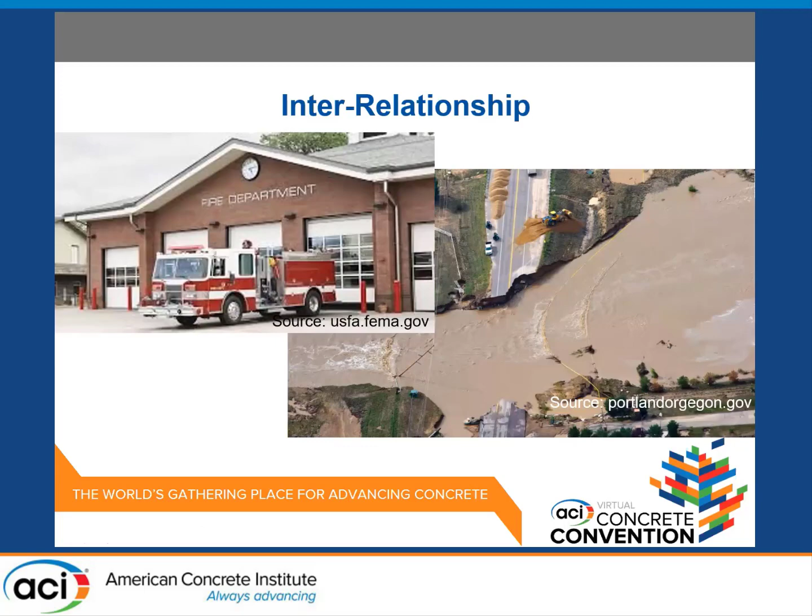One of the very first groups to ever try to address resiliency, and really has established many benchmarks for the models that are out there today, is the San Francisco Planning and Urban Research Organization. This probably goes back to the 1990s. They started with recognizing that many of their hospitals were very old and not built to the current seismic resistance levels necessary for what we learned we could expect in the San Francisco Bay Area.

So they started a program to upgrade hospitals. And as they were doing this, they said, well, wait a minute, what about everything else? So they actually went and inventoried not just hospitals, but sampled some of the construction that was out there to determine how long it would take for those structures to become functional again. And this was a great first attempt. I don't think anybody preceded them in trying to come up with a baseline.

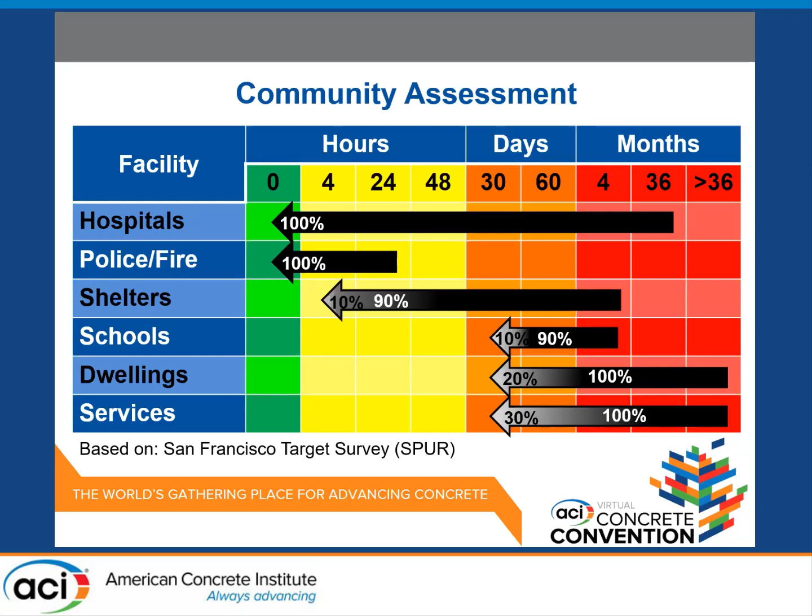You don't need all the residences to be occupied within 30 days. Maybe it's only 20% within 30 days, and maybe 50 more percent in 60 days, and you get to 100% in 4 months. So all of this stuff needs to be integrated into some sort of community plan. And I mentioned that it doesn't just stop at the community. These resiliency factors become far reaching.

A good example of a national impact is Hurricane Katrina. We lost chemical plants and refineries, they were shut down, and that raised gasoline prices and even limited availability because of chemicals that were no longer available. It even restricted the amount of unleaded fuel that could be produced elsewhere by other refineries. So it clearly had a national impact. We all saw the gasoline prices go up.

Another one had an even more global impact, the tsunami in Japan. What happened there is the only manufacturing facility that produced a key element for automobiles was taken out, and it stopped production of automobiles throughout the entire planet, all because of one disaster in one area.

So this stuff is extremely important, and it requires paying a lot of attention to many implications.

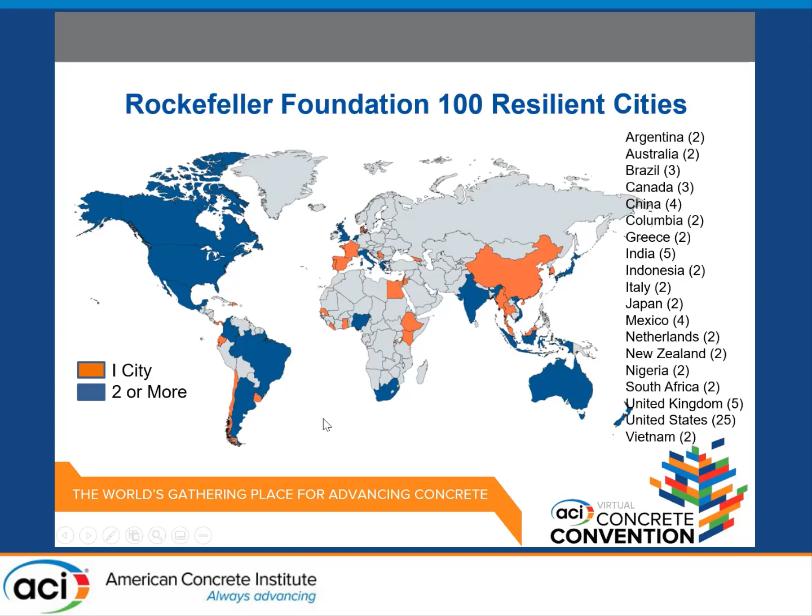One of the earlier programs that tried to address resiliency was the Rockefeller Foundation 100 Cities. This program doesn't exist anymore, it's no longer funded by the Rockefeller Foundation, but I included it here because it started looking at how to determine what resiliency is and what it means for communities.

I picked San Francisco and San Diego because globally they're relatively close to one another. But when we looked at what San Francisco thought was important, it differed from what San Diego thought was important for becoming more resilient. San Diego doesn't have earthquake faults running right through it, so their emphasis on seismic wasn't nearly as great as San Francisco. So it clearly means different things to different groups. Their stressors are completely different.

Let me back up one point. This Resilient Cities program is actually gradually morphing into Resilient Cities Catalyst. The resiliency cities program mostly helped communities and cities identify what their stressors are and who the right people are to bring together in collaboration to develop resiliency plans. Resilient City Catalyst started in February of this year to try to bring the cities that were participating in the Rockefeller 100 Resilient Cities program to move forward.

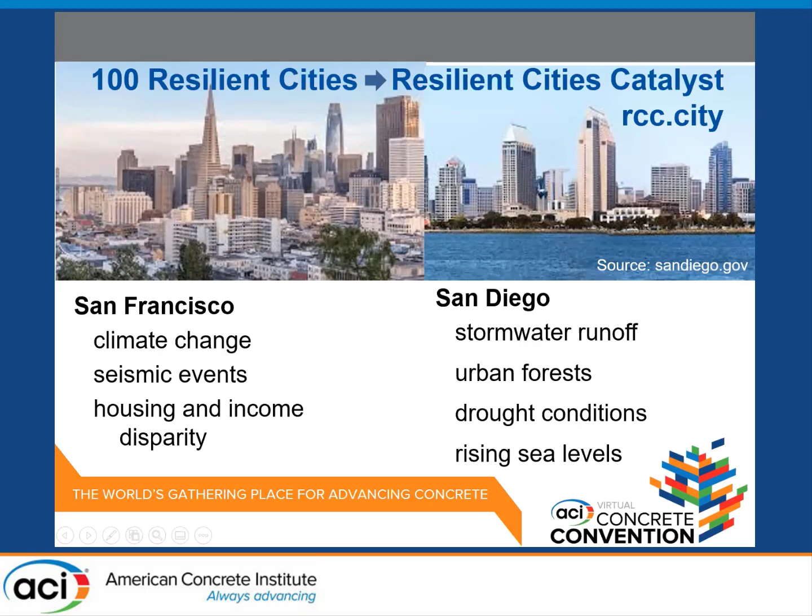Also on a more global scale, there's the Sendai framework that Julie also mentioned. It's looking at disasters slightly differently than most engineers will, because it's looking not just at the physical structures and their capabilities, but at livelihoods, health, social, cultural, and environmental assets across the board. And it expands the scope not just to individuals and businesses and communities, but also to countries and global impact.

But their targets tend to be a little bit different at that level than the targets you would have for an individual project. They're clearly looking at the mortality of the disasters, which can be extremely huge when it's an island nation in particular, and at reducing the number of affected people, which could be global impacts as well as local impacts. As for the economic losses, what the engineering and construction community can influence the most is helping provide infrastructure that will resist damage and disruption.

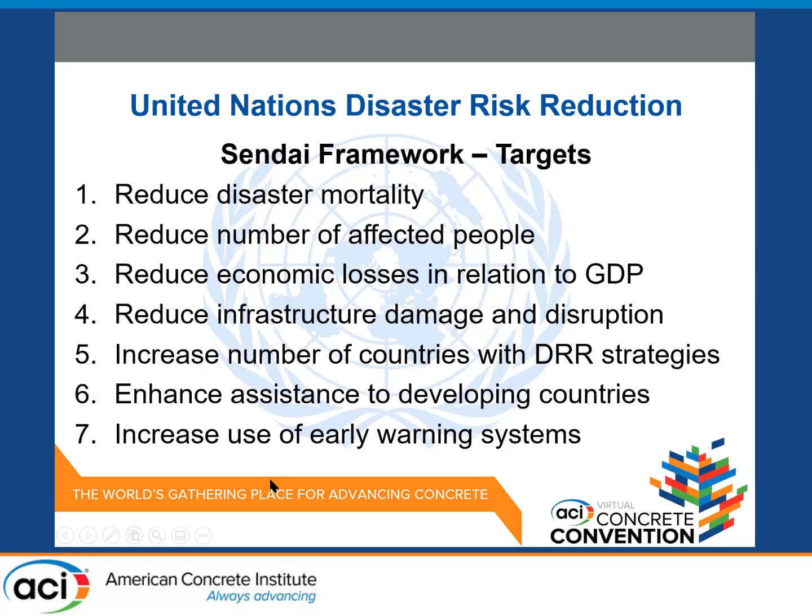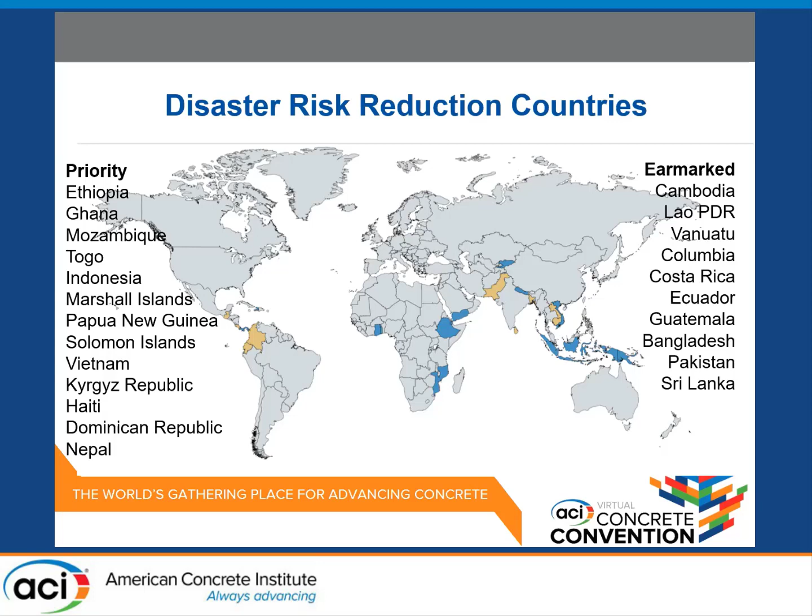So the Sendai framework is trying to increase the number of countries in their disaster risk reduction program, and trying to foster support and get organizations to participate in programs in those target countries, with the addition of early warning systems, which tends to be outside of the design and construction community. The countries currently identified as priority are shown here in blue, and some earmarked for the Sendai Framework and the DRR program of the United Nations are shown in yellow. It's an attempt to try to get especially developing nations more engaged and more resistant.

Then we start driving things down to more of a national level and national programs. I'm in the US, so I'm most familiar with the programs here in the United States. The National Institute of Standards and Technology has 5 components to their resiliency program. It starts with guides and analysis tools.

Their guides include a planning guide for communities, volumes 1 and 2, that help communities identify what their stressors are, how they can take approaches, and what approaches might be available to them to develop good resilience planning. This includes emergency response and recovery, it's more than just the design and construction.

They have a good modeling program, INCORE, or they're working in cooperation with this modeling program, INCORE, which helps them model the types of disasters and events that can occur.

One of the biggest issues out there for communities or anybody trying to deal with disasters and potential disasters, as Julie, Scott, and Jeremy alluded to, is that everything we do to date is based on historical records of disasters, but we know there's sea level rise. We don't have sufficient credible programs accepted to allow communities to make judgment calls about what they need to do and where to put their financial investments, and where to restrict construction or require different construction in order to resist storm surge, additional flooding, and other things related to sea level rise.

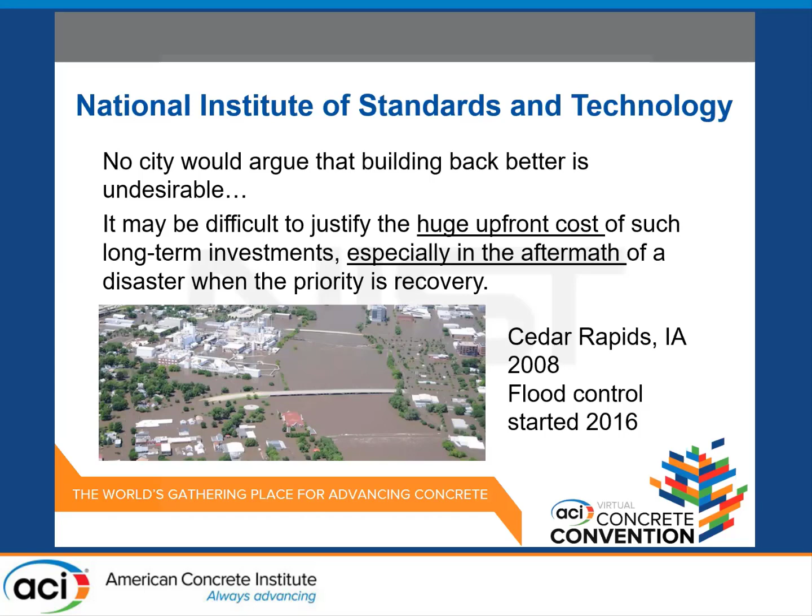There's also earthquake risk reduction as part of their programs on resiliency. The collapse assessment and performance-based engineering, earthquake engineering, are two things they work very closely with the National Earthquake Hazard Reduction Program, NEHRP. And you heard, I believe, Scott talk a little bit about, and Julie talk about the Building Seismic Safety Council and performance-based design. So that's helping us to even improve more so what happens with earthquakes.

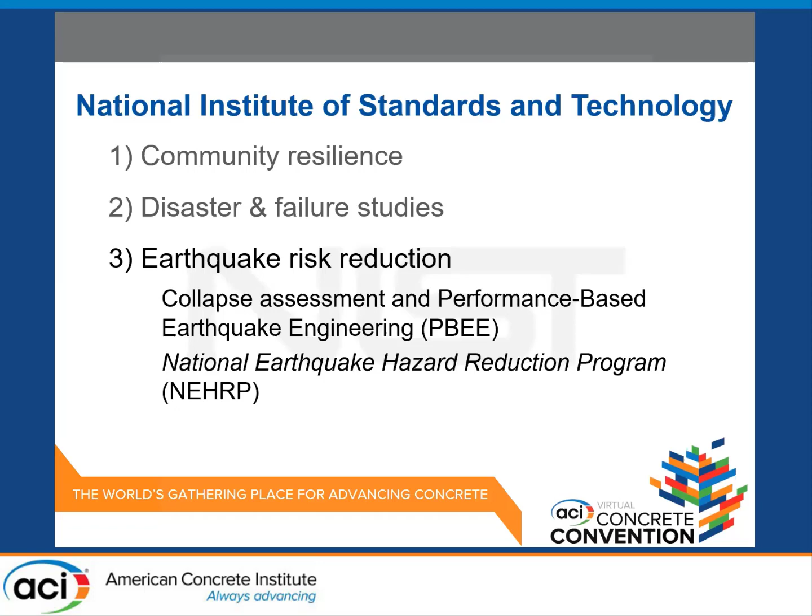Going to digress here a little bit to say that in the United States, at least, and I think it's global, we do a pretty good job of dealing with earthquakes because there's no warning system for earthquakes. So the way we address disasters related to earthquakes is we do collapse avoidance, and that saves lives. For almost every other disaster that happens — hurricane, wildland fire, tornado, other wind events, floods — what do we tell people to do? We tell them to leave. That's our life safety; we evacuate. They may go back to scoured slabs, they may go back to burnt out structures, but we didn't lose any lives. So the intent of the building code is satisfied by having this evacuation. It's not sustainable and it's not resilient, but that is what is currently accepted in our society.

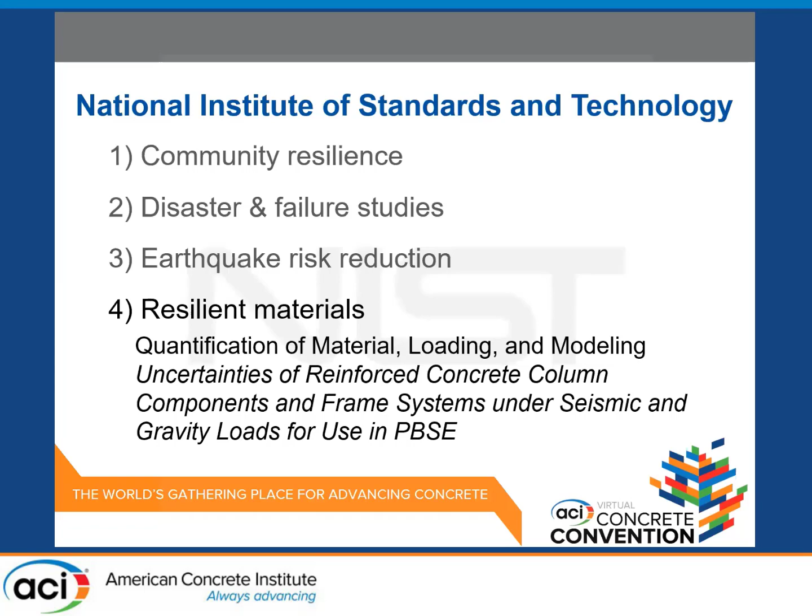They also have a program on resilient materials, and this is about quantifying how materials will perform. It's getting into fairly detailed and complex analyses and evaluation procedures, but they do have some programs related to reinforced concrete columns and components in reinforced concrete frame systems. They're trying to get a better handle on determining the uncertainty at the component level and the impacts of loadings on these structures as they get to extreme loading conditions.

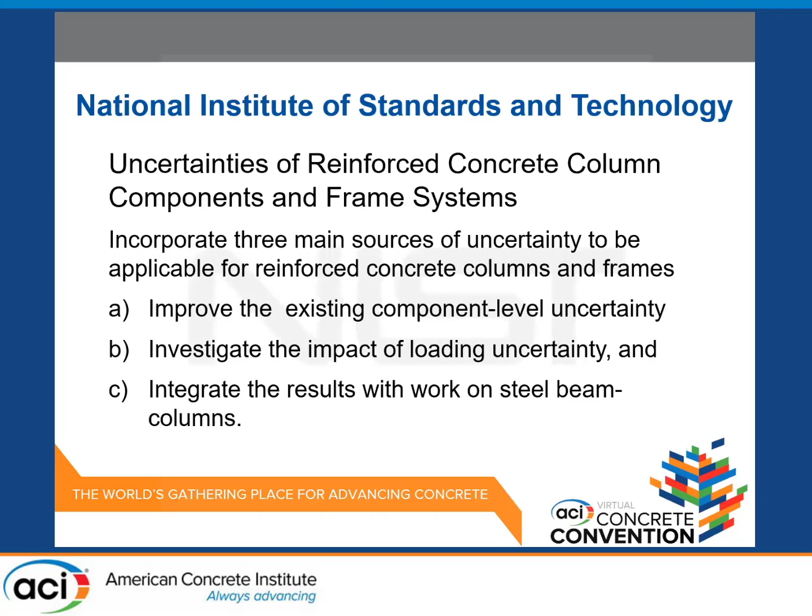They have already completed a project on steel beams. This project is still underway, and then they're hoping to integrate these results with some of the information they have on steel beam column connections.

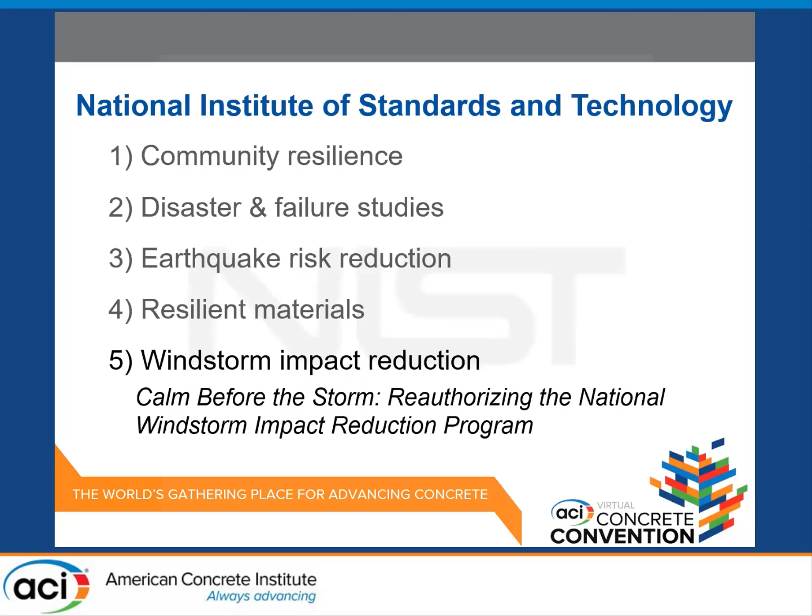Then finally, the fifth component is the windstorm impact reduction, the calm before the storm. Again, they're working with other agencies. They are supporting the reauthorization of the National Windstorm Impact Reduction Program and providing input to our load standards. So with the windstorm reduction impacts, structural performance for multi-hazards — what happens when you have a fire after a windstorm? What happens when there's flooding combined with a windstorm such as a hurricane? These are all interrelated and things that need to be considered and addressed.

We lost a lot of facilities after Hurricane Katrina to fires after the disaster. Most of the damage, even back into the 1906 San Francisco earthquake, was fires after the earthquake. It wasn't the earthquake itself that destroyed the city — it was a combination of the earthquake with more damage actually happening from the fire and gas explosions that occurred subsequently to the earthquake.

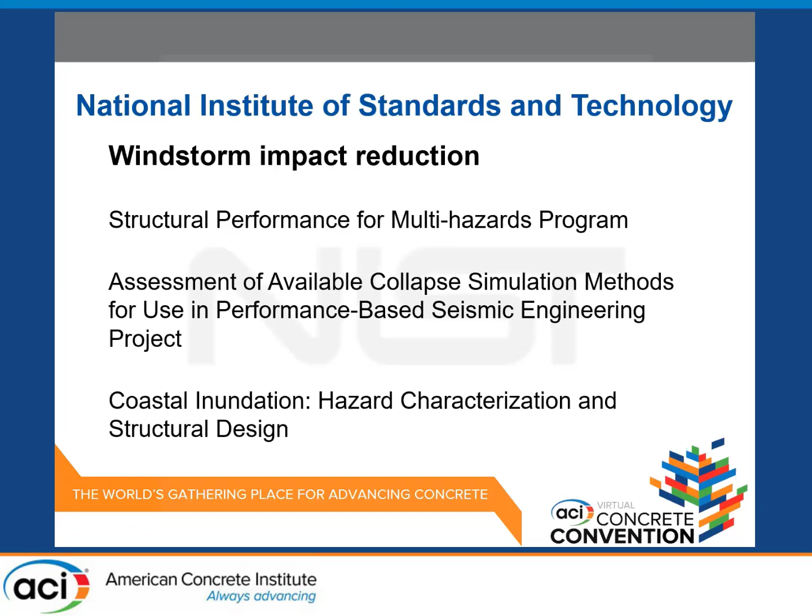They're also looking at performance-based seismic engineering projects and trying to categorize coastal inundation and structural design to resist those effects. One outcome is information from this cooperative effort with multiple agencies through NIST, working with ASCE 7.

There will be new tornado load provisions in the next edition of ASCE 7-22. We've handled tornadoes for decades, but in a strange way, because we evaluated them on the Enhanced Fujita scale, determined by the amount of damage.

These are both F4 tornadoes. One went through a town, and you can see what kind of damage it did, so you knew that was clearly an F4 tornado. The other tornado went through a farmer's field—there's no way of telling. So we don't have good records on where the intense tornadoes actually occurred, because we have no physical records of the damage that would have happened if they'd hit structures.

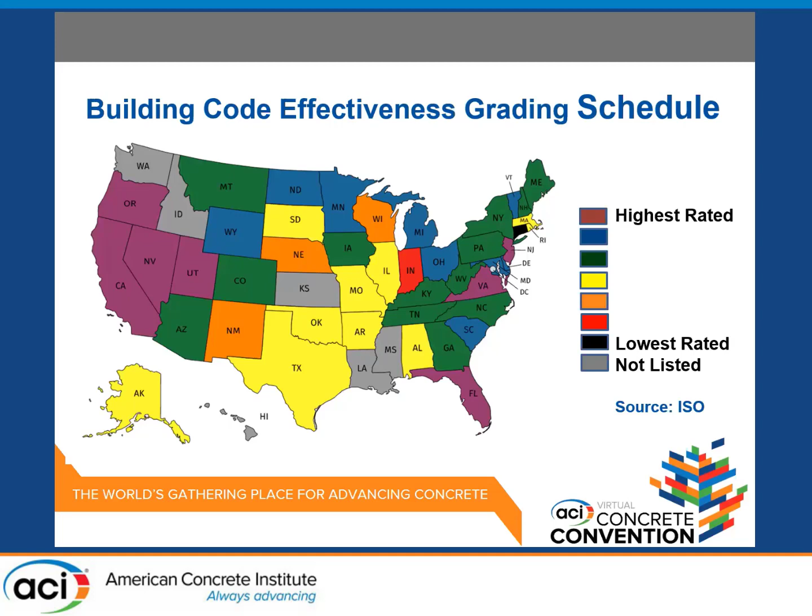One place where FEMA has helped a community a lot, and the community was fairly innovative in addressing flooding issues, is they assisted through grants for the community to buy out residents and businesses located in the floodplain. We have a lot of structures, especially in older cities, that are immediately in the floodplain.

The reason they were in the floodplain is that when they were first built, commerce and everything was dependent on those waterways. That's how they got located there, and for the benefit of conducting business and having access to those waterways, it was worth the risk of having structures there.

Well, those waterways are no longer, in many jurisdictions, the primary source of transportation or moving goods, so they don't need to be there anymore.

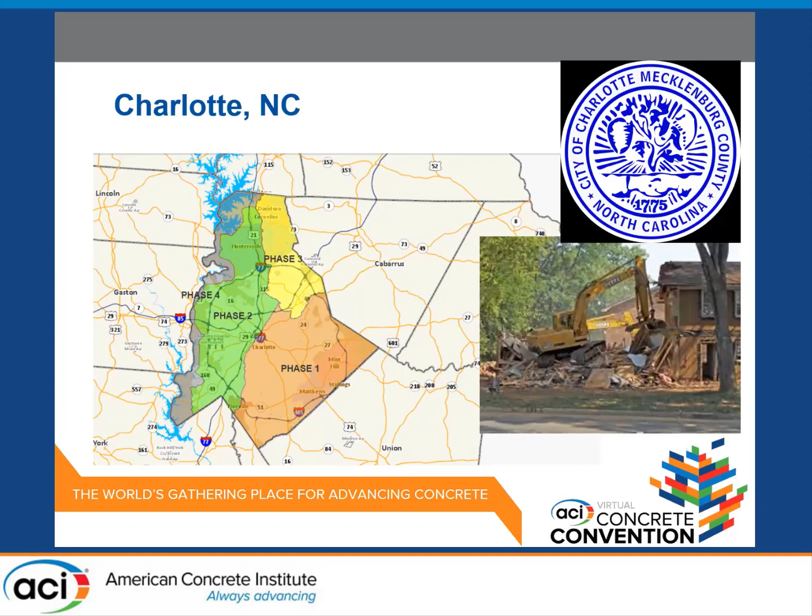In combination with the grant, Mecklenburg County, Charlotte, North Carolina, also incentivized developers by relaxing density requirements, allowing denser development in certain areas where they wanted people to move when they were buying out and demolishing their homes and turning the wetlands into parkland. It turned out to be a really good model for incentivizing developers and providing affordable housing while buying out houses and businesses in the floodplain.

The National Institute of Building Sciences has multiple programs related to resiliency, or with resiliency components in their councils and projects. The four that come to the top: number one, the Building Seismic Safety Council. They develop, through NEHRP, research on earthquake engineering.

The Building Seismic Safety Council has a group called the Provisions Update Committee, and they take that research information and figure out what's worthwhile to put into the code. Once it goes through that process, those recommendations get fed into a consensus standards development process through the American Society of Civil Engineers Structural Engineering Institute.

They also have the Multi-Hazard Mitigation Council. This has been very active in figuring out what the disasters are, what happens when you have multiple hazards, and also trying to come up with ways to invest and fund mitigation techniques.

From that council, there was an offshoot which became the Council on Finance, Insurance, and Real Estate, because those are the people who are ultimately going to determine the investment levels. And it gets really complicated when you talk about it.

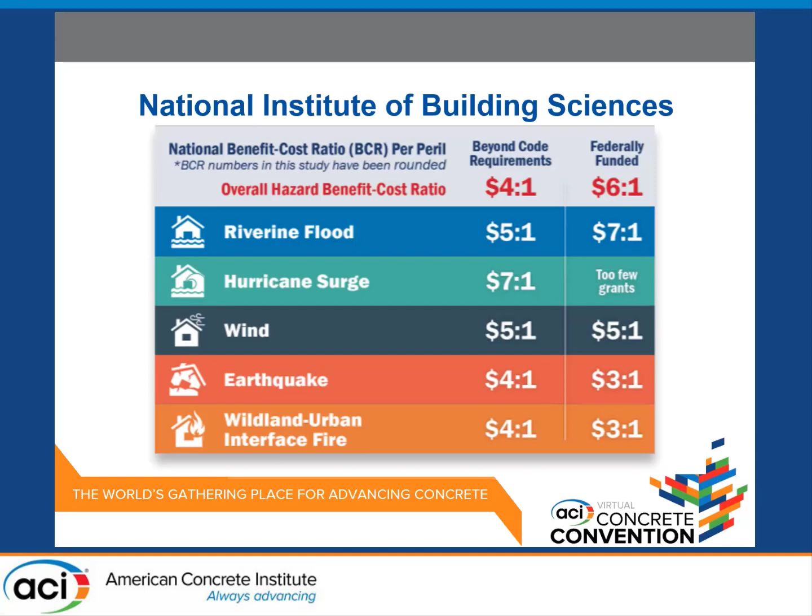So there's a lot of good resources here, a lot of great programs. Resiliency and enhanced resiliency is not new. Every structure has some degree of resilience to it. Will it withstand a disaster? We have no way of knowing.

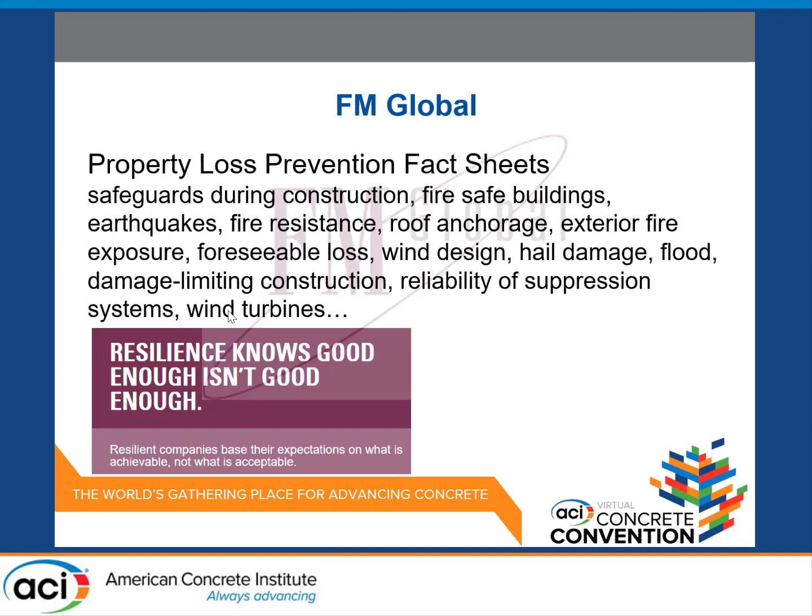But FM Global is a good example of one insurance company that works with owners to enhance the resiliency of structures. They work with them about foreseeable loss. They have great resources. Back in 1994, or prior to 1994, Anheuser-Busch in California invested $1.2 million in seismic retrofits. Northridge earthquake occurred. Anheuser-Busch considers that they probably saved $1.1 billion in combined property and business losses because they were able to stay operational. This is the type of thing that has been going on and will continue to go on.

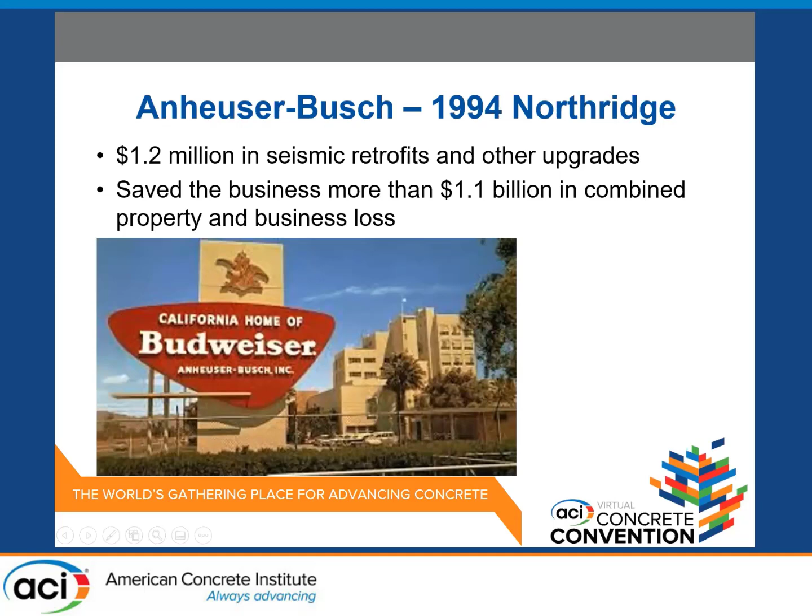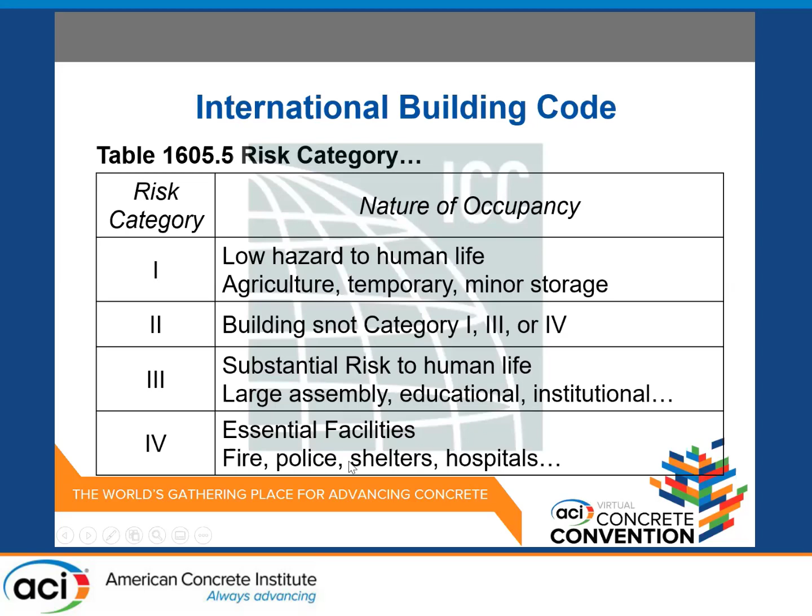Even in the building code, we have some enhanced resilience requirements. How do we determine that? Well, we have buildings in the building code in the United States. We place buildings into one of four categories: low risk to low potential hazard to human life, buildings not in categories 1, 3, and 4, which I will get to - that's most buildings. Substantial risk to human life, which is large assembly or large educational or institutional facilities. And then category 4 is essential facilities: fire, police stations, emergency shelters, and hospitals.

So we have these risk categories, and what happens is if you have a high volume facility, a large high volume facility like that Anheuser-Busch, that's voluntary - the owner wants a resilient building, they're willing to invest. Risk categories 3 and 4, the code says enhanced resiliency to some degree is actually mandated. But then all the other structures where the occupant has little potential for involvement to influence the operations, they have no influence on how their building is being built.

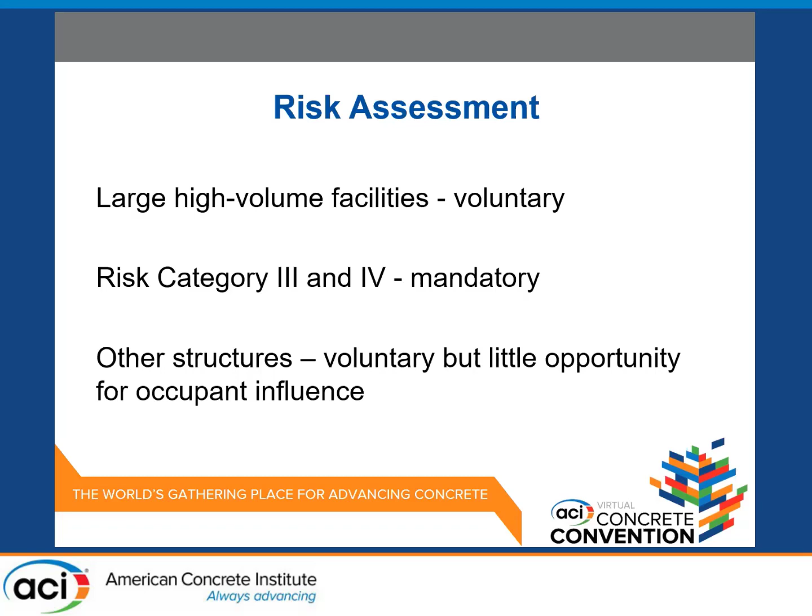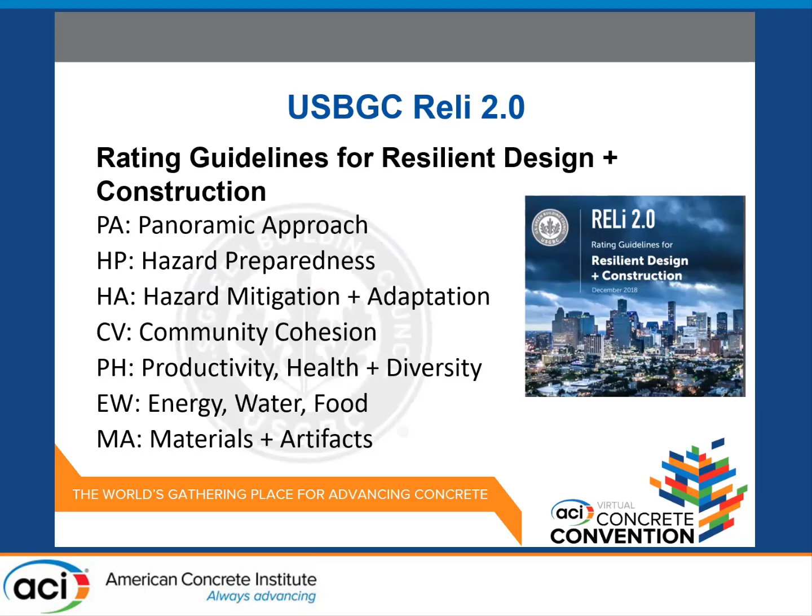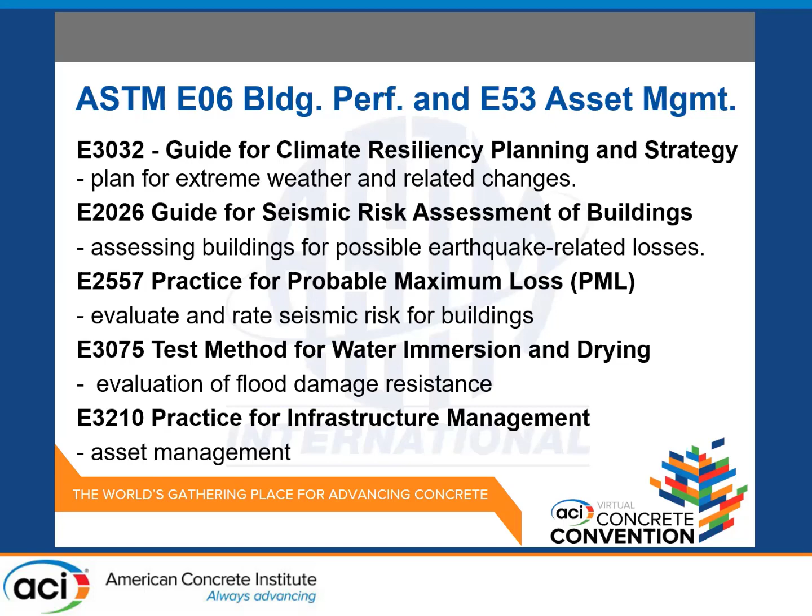So there's other organizations - the Institute for Business and Home Safety works very closely, Julie highlighted some of this. There's also now the Alliance for National and Community Resilience to develop and benchmark criteria for communities to consider. There's the USGBC RELi that Julie covered, so I'm not going to get into the details there as we're running out of time. There's the more global provisions of ISO, and almost every one of these activities and efforts could probably fill a session here at ACI, but ASTM is also now starting to write a fair amount of resiliency standards and criteria. And we have some, especially on existing structures, to help improve the resiliency of communities available.

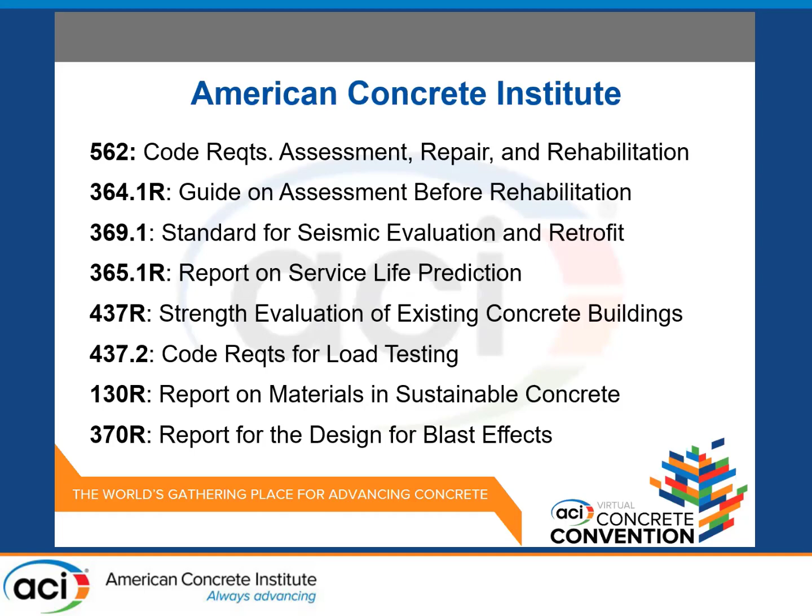One thing I'd like to quickly point out here is ACI is you. If there's needs for standards and needs for guides and information on topics, get together, get involved in a committee, form a committee if needed, and work on bringing that information together.

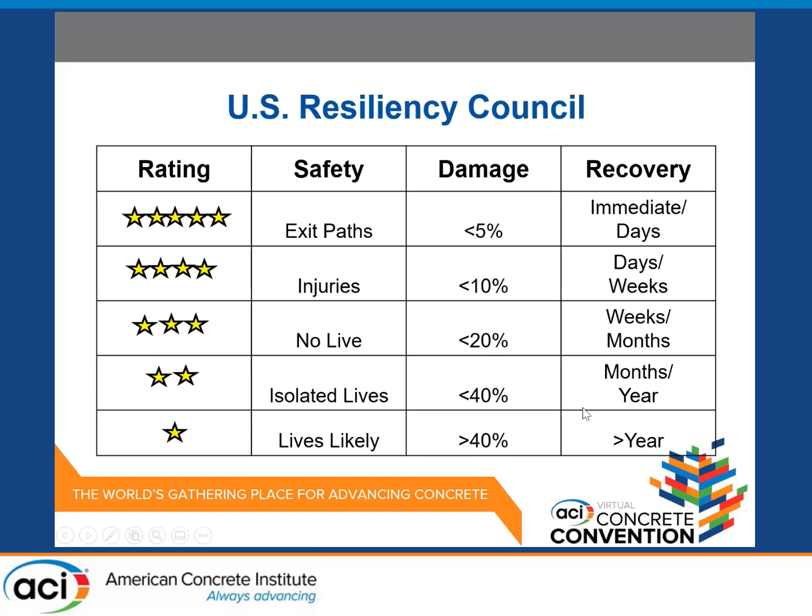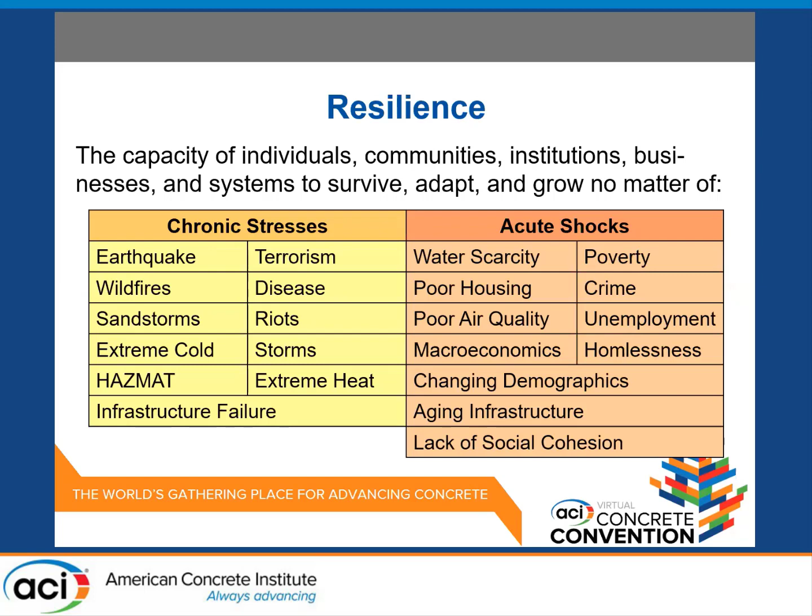Another thing to bring this full circle goes back to the California initiatives, which is where U.S. Resiliency Council started their focus. They are now expanding their efforts to more than earthquakes, but they are still looking at coming up with a rating system based on recovery and the potential for disaster. So these efforts continue, and thank you, and hopefully you can get out there and do lots of things to help address chronic stresses and acute shocks for our buildings, infrastructures, and communities.